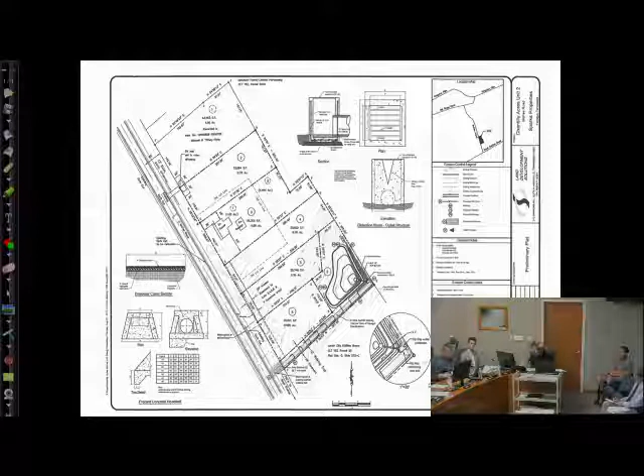Is there anyone with the applicant who'd like to speak? Have a question or comment? Mark, is this septic or is this sewer?

They are on individual septic systems, yes. Actually, I was kind of surprised by that since McFee Road was reconstructed a few years ago, but I don't think they brought sanitary sewer south of the high point. So it would be on individual systems.

Hi, I'm Rusty Baxa with Land Development Solutions, 310 Simmons Road, Suite K. We don't have any problem with any of the comments or suggestions from staff, so if you have any questions, we're happy to answer.

Questions? Is the existing house going to stay? I think so, yeah. And you also took note of the other two things relative to the final plat? Correct. Thank you. Mark, do we have any issues with compatibility with the stormwater and the open space?

Normally, stormwater facilities aren't counted towards open space, so do we feel like you need about .47 and you've got that in there? That was one of their comments, just to verify they are compliant with that. It's such a small area, it's really kind of not even a detention, it's just a low area, really.

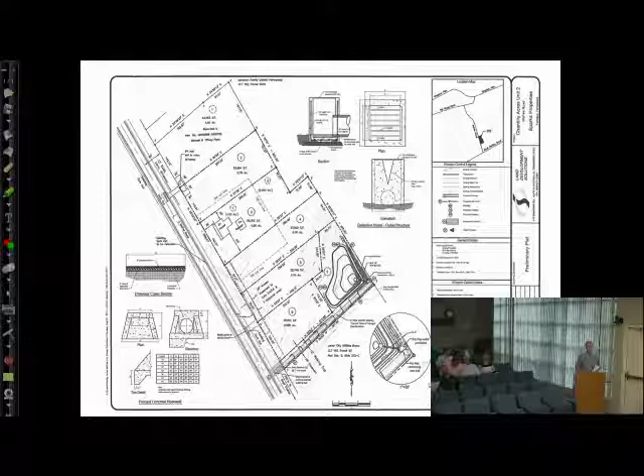What's the as-platted lots? How many total lots are there now? Well, I think there's just two - there's the one with the house and a lot that surrounds it, and then you have lot one, where the house is being built. There was a pre-existing lot, though, to the north, correct? So it's really three total lots, three going to seven.

So it's not as typical as one lot going to twenty-five. I think it needs to be treated differently. It shouldn't be held quite to the same standard as a traditional subdivision. So I'm comfortable with that. I think the walking trail placement makes sense - stormwater facilities, the open space - it's hard to, they're big lots anyway, so it's not like he's trying to jam a bunch of little bitty lots in there.

Matter of fact, all the lots exceed the R2 minimums, and that probably has to do with septic, trying to make sure they have enough room for septic. I assume they've already done their soil testing and made sure they've got good perk for their septic, and through the health department also have their reserve space. That's kind of critical for septic. I think eventually you'll probably get gravity sewer over there.

You could probably do a low pressure sewer, but it'd be expensive, and for 7 lots it probably doesn't make a whole lot of sense to run low pressure all the way up to the top of the hill. Well, there's actually only 3 new lots. Right, that's correct, yeah. You're going from really 3 to 6.

Buildable lots - the 7th is really your detention lot. So I think it makes sense, and having the joint permanent access easements make a lot of sense, trying to reduce the curb cuts on McFee Road. McFee Road is a busy road, and it's just going to get busier as the Choto Basin continues to develop. So I think it's a good use of the property, and it makes sense.

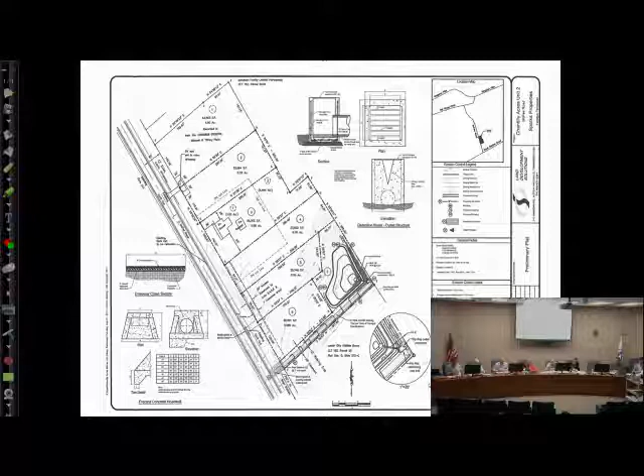Discussion and public hearing on a preliminary plat for Phase 3 of Bridgemore subdivision, 20.81 acres, 29 lots, Zone R-1 OSR, Fulghum MacIndoe and Associates Incorporated, Placemakers Number 2 Partnership applicant.

Bridgemore, as you all know, is a large subdivision being developed in phases. The initial phase was back in 2006 - a very large phase with over 128 lots. Then in 2014, the second phase, in the northeast corner on the west side of McFee Road, was developed, and that was 40 lots. Now this particular phase, Phase 3, would be just to the west of Phase 2. It's a pretty small phase, only 29 lots and 21 acres.

And so there's the lot layout shown on the screen. As you all know from our discussion back in July, when we reviewed a concept plan on the east side of McFee Road, that was on land originally part of the entire Bridgemore development. The concept plan will have to be revisited, with that land taken away from the overall concept for the Bridgemore subdivision. They'll be presenting that next month in September for your consideration, and part of that they'll be looking at making sure that the property on the west side complies with all the OSR requirements, namely the 35% open space.

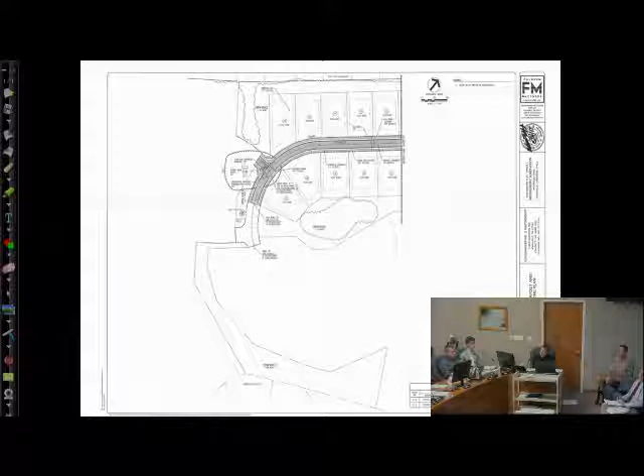So we found that the 3 foot strip is kind of a no man's land - it's hard to mow and hard to do much with it. It does give a little bit of buffer, but in the future we might want to revisit that in our subdivision regulations to consider a wider, more functional grass strip on new local streets. They've been good enough to try that out here. Apparently that took a while to convey, but we appreciate them working that into this particular plan.

The remaining comments are at your places. There's really not any that, from staff's perspective, couldn't be worked out. We would recommend approval subject to those 9 comments being satisfactorily addressed. And if you have any questions, Billy Fulgham is here to probably answer those.

Hi, I'm Billy Fulgham with Fulghum MacIndoe Associates. I'm the civil engineer for the project.

I think we're in agreement and have probably worked through most of these comments already that we've talked about. There was only one that I had a question about, and I think I've got good direction from Mark on how to proceed forward. So I really don't have anything other to add or contest.

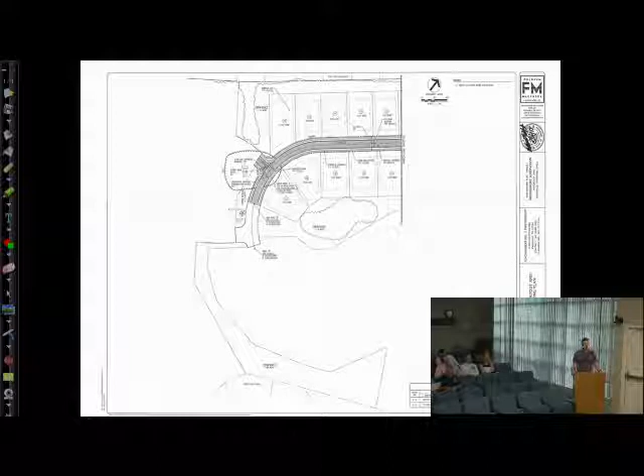Is that the one about the depressions? Yes, ma'am. Which number is it? We think that those were man-made essentially, but we just need to have a professional that's familiar with that, an expert in that area, to make that assessment based on their field review and the evidence provided by Billy.

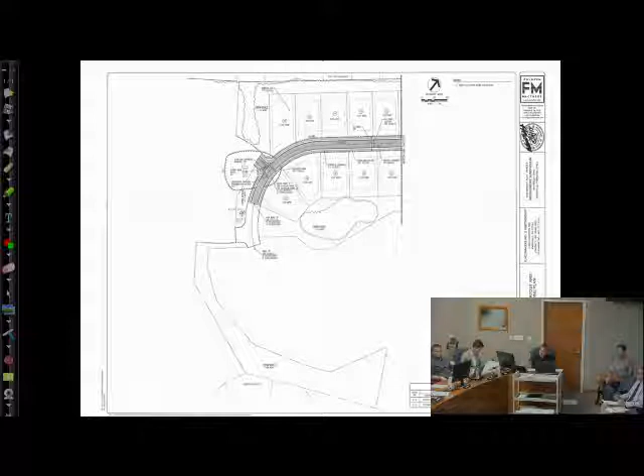Any other questions or comments? Anybody in the audience have a question?

Have a motion? Approval subject to the 9 stipulations. Second. All those in favor? Aye. Aye. I think I need to abstain.

My property adjoins this property. Do I need to? You don't need to abstain, but you can if you want to. But I wouldn't. No, I'm fine. So we'll add one more to it. Okay. Thank you.

There wasn't anything part of that that affected your property. Yeah.

Okay, number 8, discussion and public hearing on request for a site plan amendment involving modification to building elevations associated with the Farragut Gateway project, former location of Silver Spoon at 103 South Campbell Station Road, 2.2 acres, Zone C-1, First Farragut Development LLC applicant.

Property is a former Silver Spoon, as noted there. The site plan was actually approved back in May of 2016, and the property owners since that time have been trying to secure leases and get the numbers to work. As we talked about back in June, one of the issues they were running into was trying to meet the then requirement in the mixed-use town center of all new buildings being at least 2-story or having the appearance of being 2-story.

So the staff presented this issue to the commission at that meeting, and we talked about whether we might want to revisit some of that and provide a little more flexibility for smaller lots, because the issue they were having was they don't have enough physical space to provide the amount of parking they would need for the uses they were marketing toward, to have a functional second floor.

Mark, on that north elevation, it's right up near that very steep drop-off, isn't it? Yeah, so it kind of obscures the fact that it's big. It looks like a big flat, open elevation on the drawing, but in reality it wouldn't, because it's sitting down on a big drop. It would be well below the road.

Does the applicant have any questions or comments, or does anybody have questions or comments for the applicant?

Would this be addressed by the VRRB and landscaping? They've already approved the landscape plan when the site plan was approved back in 2016, and that's not really changing, other than adding some more evergreens to meet the screening requirement for the drive-through lane. That was a requirement for having a drive-through in the mixed-use town center — you have to screen it so you can't see it from any elevation. But other than that, they've already pretty much approved it.

So we're still going to see the blank red wall? Well, that's up to you all. I just point that out as really the only thing they might need to enhance a little, hopefully at no additional cost. What about doing some false windows out of brick — maybe a row lock, a soldier course, and a herringbone pattern? I think there are some things you could do.

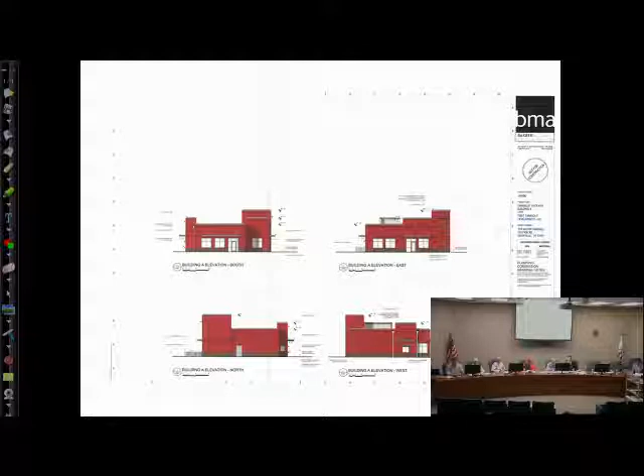Hi, I'm Ellen DeVoe with Barber McMurry Architects. To address what you were just speaking about, we have a row lock on the lower level, about 2'8" above the finished grade, then a banding up at 16 feet — you can barely see it unless you zoom in on that elevation. We also have 4 recessed herringbone patterns to reflect bricked-up windows, basically.

So you're saying on the Building A north elevation there is some herringbone? Correct. Okay, it's just not coming through on the renderings. Maybe if it's zoomed in it could be visible. That works for me — but is there any way to draw that in to make sure there's no misunderstanding?

You don't have it set up where she could put a pin on it? That way — oh, yeah, if you want to come over and draw on it, that would give us a better idea. You guys are kind of setting the tone for development in this area, and we're just trying to make sure we understand what you're doing. I'm very much in favor of what you're doing, but I think there are some details that wouldn't cost you any money that you could put on this side of the building.

Yeah, I've never done this before. It'd be a lot easier and cheaper than windows if you don't want windows. No, it's finicky — so right there is one. You can see it if you look on the computer screen. Well, I'm looking on the computer screen and I don't see it. You can see a little bit of the outline of where they are.

I can faintly see an outline on the screen. How many are there? There's 4, total on the north elevation, and you also have some on the west elevation too, plus some up high in the parapet. Is that correct? And that's for the sign — do you have signage there? Because that faces Kingston Pike.

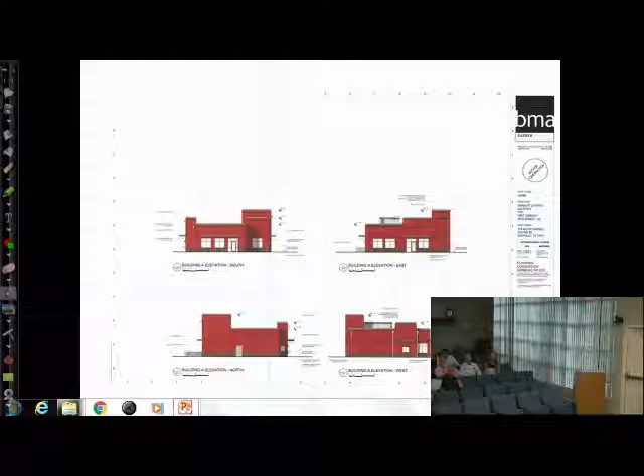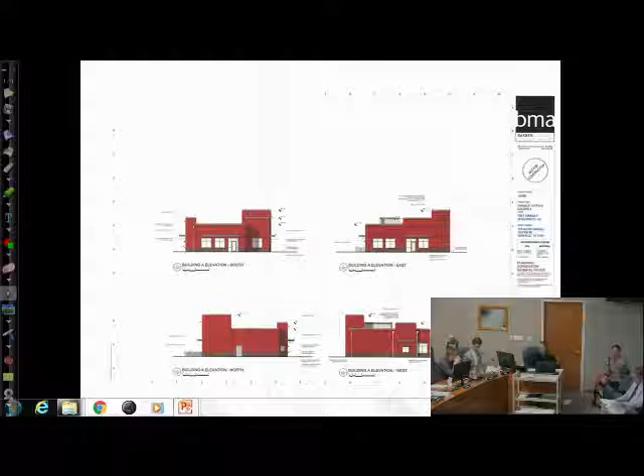But one thing I noticed coming in, and I've been thinking about this, it's the flat roof. The other buildings around here have peaked roofs, and the new Dollar General has a peaked roof. You were talking about setting the tone for what's coming. I noticed the credit union over here has kind of an interesting thing - not only a flat roof, but it has some kind of peak in the middle of it, if you've ever noticed it. We have, and John, it's a great observation.

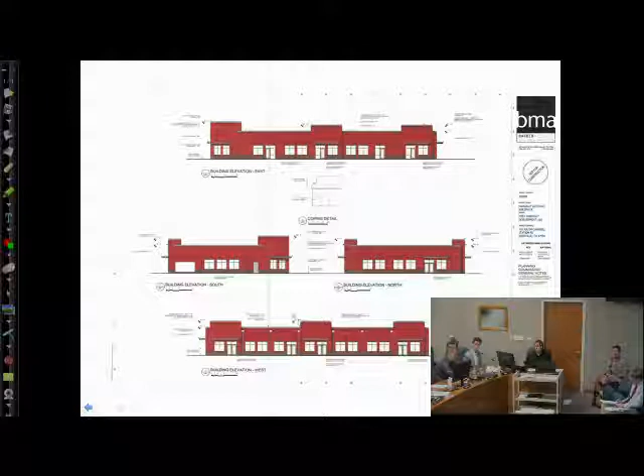What we're trying to do is in areas that are more characteristically residential, like the Dollar General store, that's when we're trying to encourage pitched roofs. In areas where we're trying to emulate what we hope someday will be a downtown Farragut, we're going with more historical downtown style buildings that have flat roofs. So yes, I agree with you. The jewelry store across the street has a pitched roof, but that's not exactly what we're going for. We're really trying to set this tone for more of a downtown style flavor.

I know it's hard to look out a number of years and think that Farragut will have a downtown, but this is really the start of it. We're trying to create a bit of that type of more urban architecture. I hope that answers your question, John. Yeah, it does, and I'm absolutely in favor of getting that thing developed as soon as possible. I just wanted to bring it up.

So it will be a change, but someday some of those buildings will be renovated. The property becomes so valuable that somebody will want to tear them all down and start over again, and then we can hopefully bring them into compliance at that time. Excellent, thanks. It's always good to have a dream. Do you have any other questions or comments?

Were there any subject-tos? No, that was the only thing, just to look at the building elevations. Like I say, for the site plan, we'll look at that in-house and make sure the subject-tos have been addressed. And it's pretty much the same site plan you've had since last year, isn't it? Oh yeah, yeah.

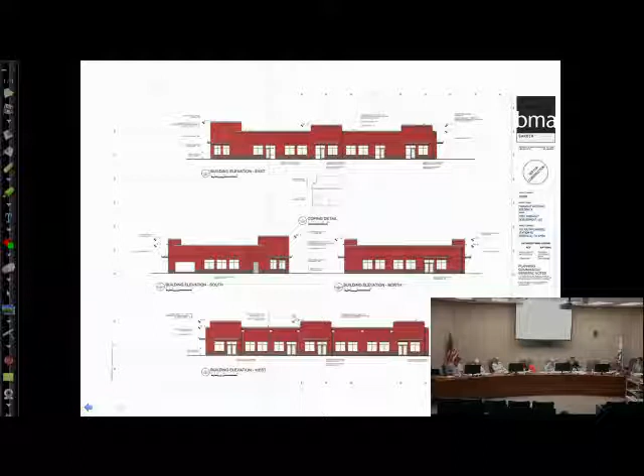Motion? Move to approve. Second. All those in favor? Aye. Opposed? Thank you for coming in. So when do we start digging a hole?

A public hearing on a site plan revision for the Overlook at Campbell Station Apartments, parcel 108 and 109, tax map 130, zone R-6 OSMFR, 820 North Campbell Station Road, 31.94 acres, GBS Engineering applicant.

Should have brought a sleeping bag roll for this one. This particular project has got a long history, as you all know. Back in 2014, it seems like forever, we revisited our multifamily zoning district, the R6, and as part of that we created an open space version of what we've done with single family, like the OSR and OSMR - that's the R6 OSMFR zoning district. That district would allow you to build taller buildings and lessen the setbacks.

It gives you some flexibility that you wouldn't have in the regular R6. But in exchange for that, the development had to leave at least 50% of the land in permanent protected open space. So this property north of the Holiday Inn Express was rezoned in 2014 to that zoning district. That's the only property in the town currently that is zoned this. And since that time, they've presented a number of site plans to you all.

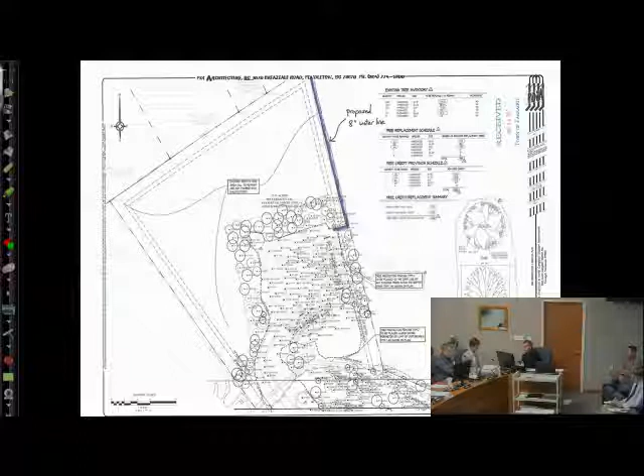The rest of the buffer would be left in its natural condition, and that would come in almost like an angle to serve that northernmost building.

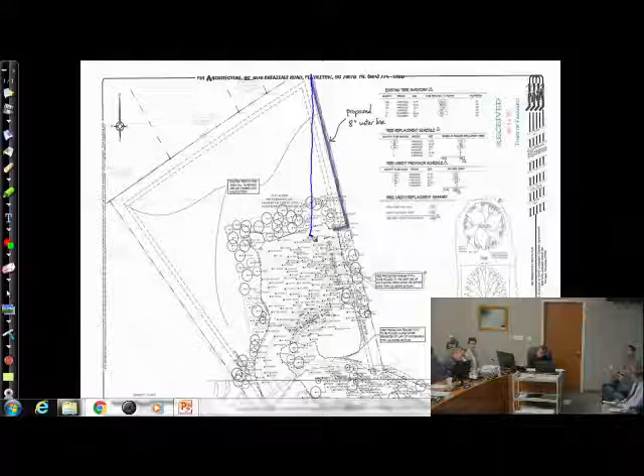So that would be something for you all to support regarding the line extension. Now it is obviously in the open space, and we've continued with each site plan to encroach into that open space, but they still meet the 50%. Yeah, that's one thing to consider.

Another item — I don't know if you want to talk about these individually before we go to the sanitary sewer, or I'm just trying to cover the new information from that. But that's the first one. Let's see if I can get this to work right.

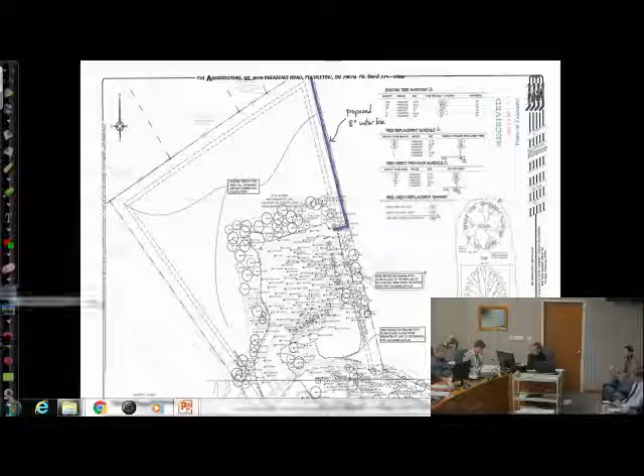What they would need to do there is demonstrate that within the portion of the buffer strip they bisect, they're not removing any mature existing vegetation, because that's a requirement in the zoning district. It looks like they could do that, moving it around a little bit, since we're just talking about the buffer strip part.

The next thing to talk about — and I think we discussed it in 2016, but I've slept a few nights since then — is whether this development, as you're driving along Campbell Station Road and look over at it, has that project-identifiable, iconic architectural feature that you identify with this particular development. They may have something else to look at for you all to consider.

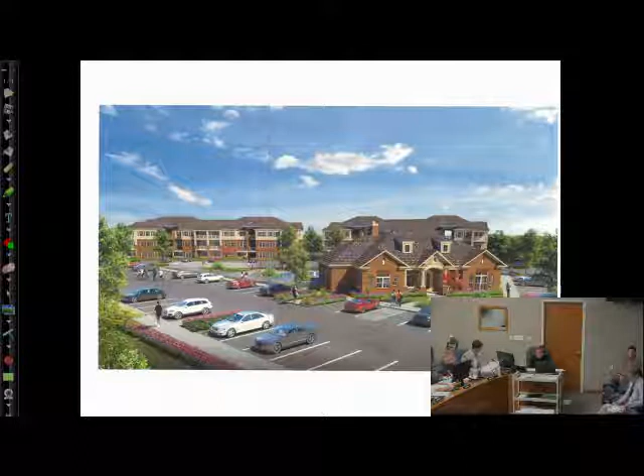Does anybody have any questions of Mark? Or this Mark?

I have a question. Comment number one is, please provide a remote emergency access road.

Are you even capable of doing that on this? We're showing it as a reinforced soil area right there, just as you go past the storm pond, the first pond on the right. What he wants is a detail of how it's going to be able to handle the 30,000 pound load. I've already got that. I just didn't include it on the details yet, but it's going to be a reinforced earth woven basket put below the grass, so you won't see it, but it will be able to handle a 30,000 pound fire truck, because I've got another project right now where I'm doing a driveway to handle that.

And they're doing it in gravel. So my name is Mark Bollick.

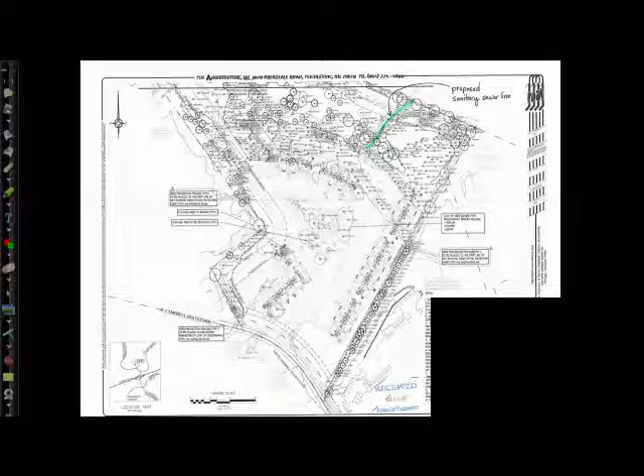I'm with GBS Engineering, sorry, Ruth. And I'm at 1313 Calmia Road. And I'm not the only one that's going to be presenting stuff in front of you today. As you can see, we have a little crowd tonight, so I'll turn it over to them. We're here to answer any and all questions you have.

Good evening, I'm John Gumpert, 3924 Paces Ferry Road, Atlanta, Georgia. I'm here on behalf of the development.

I'd like to thank you guys for sticking it out over 3 years. I know it's been a tough process. I do think there is a need for high-quality multifamily in the town of Farragut. And we welcome you, and we're glad you're here, and we're glad you've been able to find some common ground with some of these issues that you've worked with over the past couple of years. And we kind of look forward to trying to resolve some of these issues tonight.

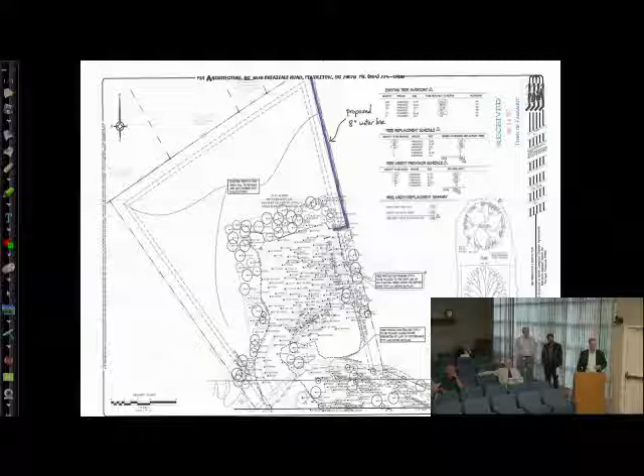My thought is on the water line, if we'll just kind of tackle these one at a time. We've got three issues if you want to boil all the fat off: a water line, a sanitary sewer line, and may or may not have a brick issue. But my thought is on the water line, if you could get creative, being that a water line doesn't necessarily have the design criteria that a sanitary sewer line does, maybe you could do a little jogging over there to move around some of the big specimen type trees. Then you could locate that water line with your surveyor and determine the easement. It might be a pretty easy way to do it. I'd much rather you see you cross it diagonally and get creative with your design than go parallel with the buffer. I think it really sets a bad precedent.

Even though there aren't houses next door to you with folks that have backyards that back up to you, the reality is they're residential zoning, and we want to treat everybody fairly and evenly and put everybody on a level playing field. So my thought is if you could get creative with that, I know it's not as easy as drawing a straight line from point A to point B, but I think it might solve your problem. I'm not saying do a lot of jogging, because I know an 8-inch water line especially is an expensive water line. But I think you could put it through there, get it across that buffer, and then get it over to where it needs to service your buildings.

Yeah, we're happy to do that. I think that's a common sense way to fix that problem, and that's not a problem.

Anybody else have any more questions? No, I just reinforce the comment and say that it's a must to have that water line in there. It's a safety issue. Yeah, we're enhancing the fire protection, and the other side of it is for this development we have 50% undisturbed, and it's still 50% undisturbed. Having said that, jogging the line to avoid specimen trees will make it better for everybody. So I'm happy to do that.

The challenge with the sanitary sewer, which has been done before, is dealing with the aquatic buffer. Obviously we try to keep everybody out of the aquatic buffer, but sometimes sanitary sewer has to go where sanitary sewer is. You just don't have a lot of options, especially when you're trying to tie into an existing line.

Is there an existing line over on the other side of that little drainage way? Is that what you're trying to tie into, a manhole over there? We are being directed by First Utility to hit a specific manhole.

On the utility plan, we had to go out and have it shot, the rim and invert shot. We have barely enough invert to get running minimum slope to get underneath it. Like 1/8 inch, I take it? It's got to be an 8-inch sewer because it's main.

No, I would say 1/8 of an inch of fall. Well, we're looking at 0.5%, which is the minimum you can do for an 8-inch line.

When you're in an aquatic buffer area, we don't quite give you the flexibility we would give you in the open space in the back, as far as just putting it wherever you want as long as you go around the trees and save what you can. Here, it's a little more critical.

So I guess based upon your tree survey, you've tried to snake it in there. We also have to watch out for the proposed storm pond to the south of that too. How deep do you think that line's going to be there?

Where it comes across the aquatic buffer, at the minimum depth I can make it, it's going to have about a foot of cover underneath the intermittent stream. What's nice about that is it's going to keep your slope laybacks to a minimum, and keep that disturbed area to a minimum.

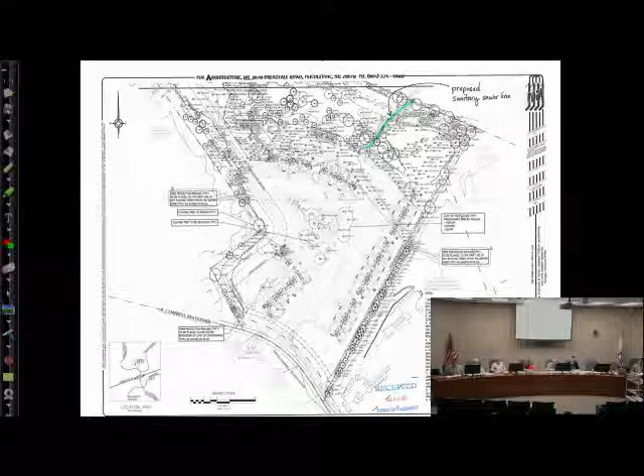And obviously you have a topography issue trying to get to that manhole. The problem is, in our original plan, we tried to tie it in underneath our proposed culvert. To do that, we were running with sewer depths of 28, 30 feet, and First Utility said no, nobody wants to service a line at 30 feet. So they came back and said, go this way.

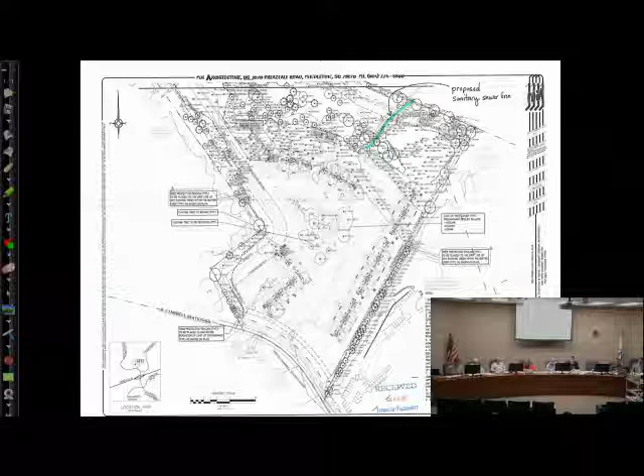And in fact, they're also making us, on the units running parallel with the apartment complex, gravitate all the basement units over to a lift station and pump them up into the sewer system that'll be in the parking lot, which is where they're asking us to put it. It's not where I wanted to put it, but that's where they want it. Those will be, the lift station and the force main will be theirs once we get done.

The gravity sewer for that, all the rest of the 3 stories above will go towards the parking lot. We're having to do a split sewer system for those 4-3 split buildings there, which is going to add cost to us. That's what First Utility is requiring us to do, so we have to do it.

Well, when you have East Tennessee topography and you've got to run downhill, sometimes you got to pressurize, and there's nothing you can do about it.

Does anybody else have any questions or comments with the sewer line? We'll have to mark that one too. Like I say, on the buffer at the very top, they'll have to make sure they don't disturb any existing mature trees. The 35-foot buffer strip, based on this, it looks like they could get it in there without doing that.

So especially if it's that shallow. How big a line is that going to be? An 8-inch line. Root pruning on both sides, it's probably going to be an 8-inch line, and we have to hit a manhole in a space, so it's not like we have a lot of opportunities to wig and waggle.

Any more questions and comments? And then the iconic question is the next one. Pat, I'll let you talk to that.

My name is Pat Iannelli, I'm the architect with PDI Architecture, 1020 Breazeale Road, Pendleton, South Carolina.

So originally, back in January of 2016, what you're seeing is what we were proposing as iconic elements for the development or for the building. I think there was some clarification that it was more of a development iconic type feature, which was wanted to be seen from Campbell Station Road. So we've been going back and forth, and we've come up with some schemes which Mark has not had a chance to see.

The first building, the closest to Campbell Station Road, and I don't know if you can, Mark, can you change it back to, we have a site plan. Yeah, let me see what.

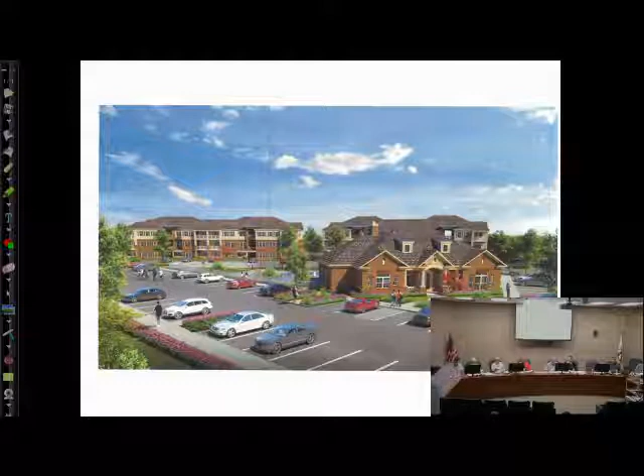Trying to think of which slide would be best here. Well, I'll just show an overall site plan. I think this might show it. No, it's the wrong one.

And on the southeast side of that, which would be viewed, we are proposing to do some tower elements similar to what we were doing on the buildings, only more substantial.

What you see at the bottom is the facade that you would be seeing, and this board shows enlargements of those iconic towers. That element will set the stage for the project and be what's viewed and identified with the project, which I think is what the desire was with the development standard.

I like the towers. And are those windows going to be active in those top floor units? Yes. So that corner, yeah, I think that would be a real desirable unit to have, super.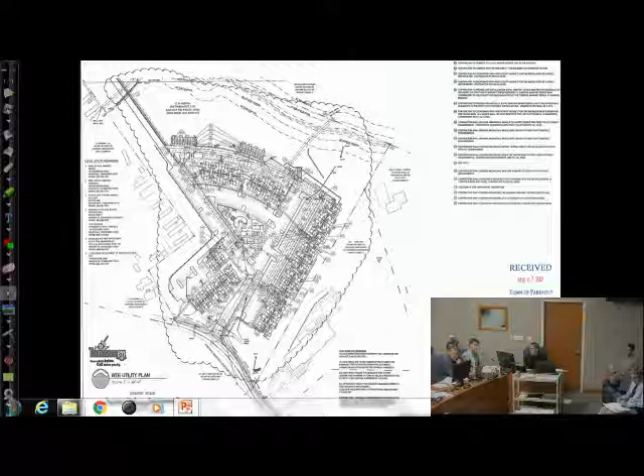I don't disagree, but I'd make the observation that from these renderings and looking at the iconic element, I don't see any reason for concern. I'm not hung up on whether it's 68% or 70% or whatever - I'm looking at what's covered and what's the transition zone in this set. I know what I've seen with the iconic elements. I think bringing all the elements together is good for the record, and what we'd have is some variance we can talk about. We don't have to talk about percentages of the variance - we can talk about accepting the variance from the previous submittal and move forward on that. So from a cleanup standpoint, fine, but personally, I'm satisfied with the coverage I see.

Well, I think the more brick, the better. I think it's a classic look. I think it shows a permanency. We talked about that with developments before. But

I want to see what I'm voting on. Yeah, I think bringing it together in one package is still good. But I think we've got to have exhibits entered into the record that don't have a piece from here and a piece from here. It needs to be cohesive and it needs to tie back into the site plan.

Probably not what you guys want here, but this body has to be able to arm the staff with the right information when you guys submit your construction documents. Otherwise, you're going to get held up there, and you're going to come back to this body. Because if there's a gray area with staff, they're going to say, well, you got to go back to planning commission because that's not exactly what I remember.

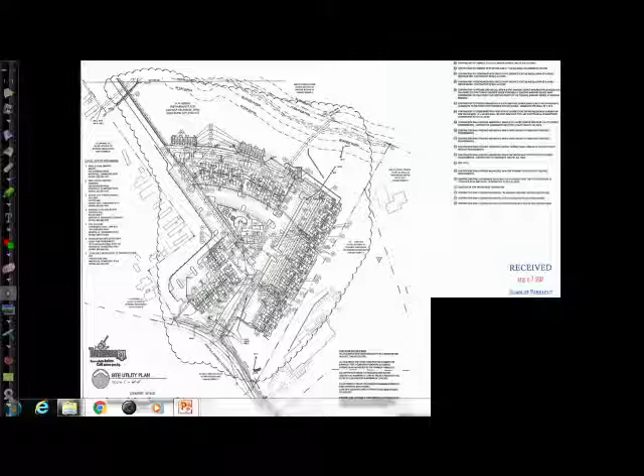Because it really can't - until you've got a set of elevations, you can't even pull the trigger. You're in schematic design right now. It's hard for you to go all the way to construction documents. So we're quite a ways down on construction documents, but the issue for us is we're not able to go to final closing with our loan until we have your approval. And then an ultimate building permit.

Now, could we start clearing? Could we start some grading if we were able to pull a site permit? We might fund that out of equity. Okay, so we might be able to start that - we own the land. But it is certainly important to us to get full approvals on everything we're doing.

Well, you don't want any moving targets any more than we do. No, we sure don't. But I do appreciate where you're coming from on that question of percentage of brick.

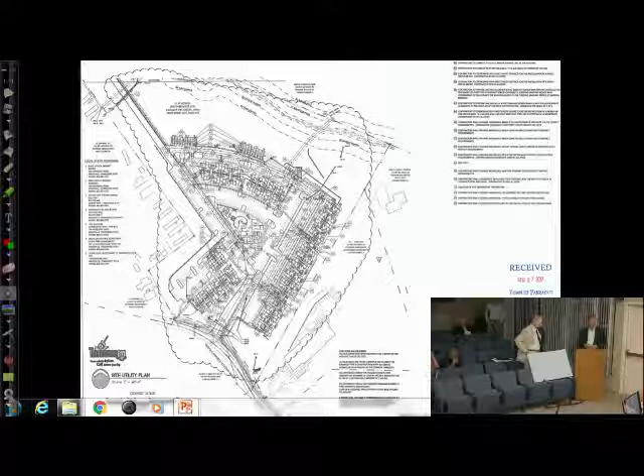Okay. Okay, Mark, how do we craft a motion? Well, my old motion will just die for lack of a second. So if somebody else wants to go at it, I think Louise looks energetic enough to jump on this motion. I don't know that you can craft a motion and accept all the subject-to's except 10.

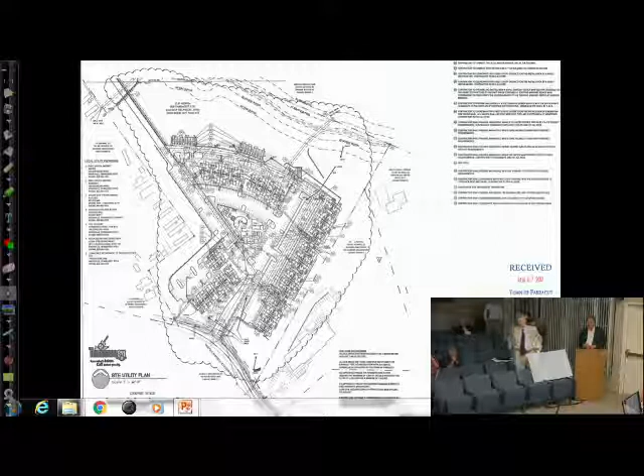Well, you got to be careful, because if you throw that one out, then you're on the record saying that one doesn't apply. That's what I mean. How do you - defer number 10 to the next meeting. There you go. Clear that - number 10 will be considered at the end of September.

Approve, per the subject-to's, deferring number 10 to the next meeting. Well, you did a lot better job than I do with my motion - you did yours in about 7 words, and mine took about 55 words. So I will second that motion. Okay, Mark, are you - yeah, I got that.

Okay, we have a first and a second. All those in favor say aye. Aye. Those opposed? Thank you.

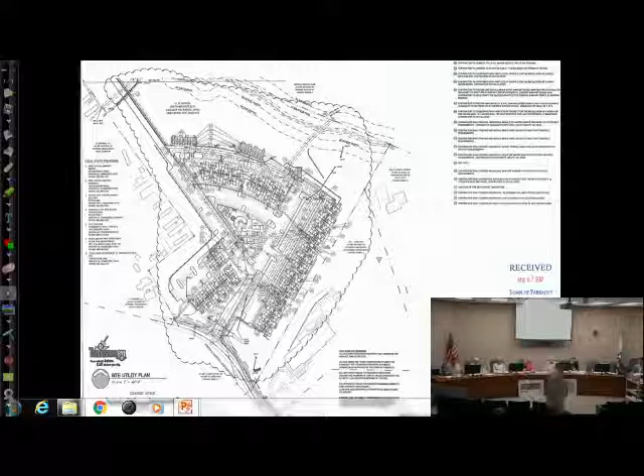We move on to discussion and public hearing on a request for the recommendation to the Board of Mayor and Aldermen concerning traffic calming applications on Thornton Drive in Thornton Heights subdivision.

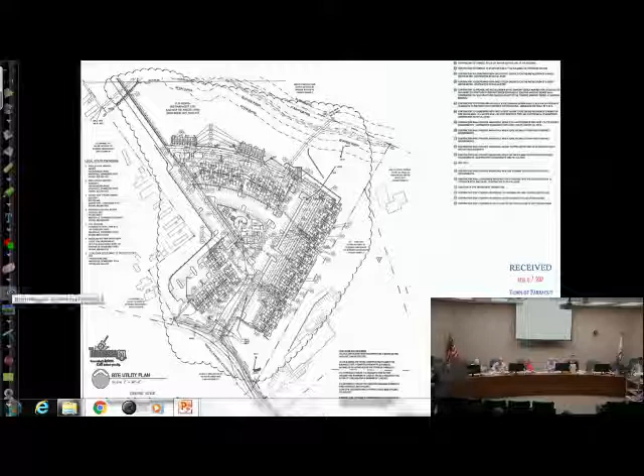I'm going to turn this over to David Sparks, Assistant Town Engineer, and I can toggle through these slides for him, but he'll give you an overview of this project and what the town's proposing for the traffic calming measures. We've talked a lot about this issue directly and indirectly, so it's exciting that we've got a subdivision where we're asking to apply these techniques. So you can just let me know when you need to go to different slides.

Thank you, Mark. Good evening. I'm David Sparks, Assistant Town Engineer for the town of Farragut. What we're here for tonight is that several citizens back in September of '16 submitted a traffic calming application. They were concerned about speeding in the Thornton Heights subdivision.

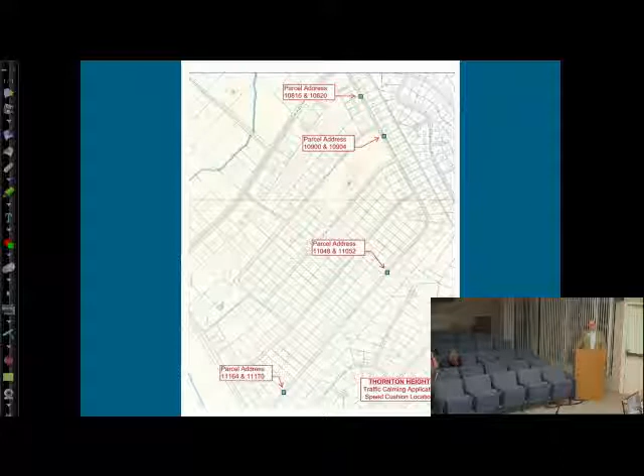So they've gone through the process, and where we are right now is we've done a study, put together costs, and had public meetings. What you see on the slide is just about all of Thornton Heights, and there are 4 locations where we, as the traffic control team, have selected for traffic calming.

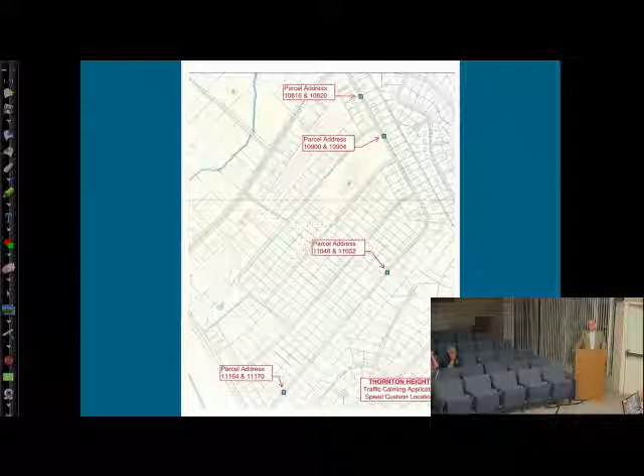In this picture here, it's an aerial view showing the location of each of those traffic calming devices. We tried to strategically place them so they wouldn't inconvenience folks pulling into driveways, backing out, or pulling campers and trying to back in. That's the reasoning for their locations, and we also wanted to get a few devices on the Kingston Pike side and a couple on the Concord side.

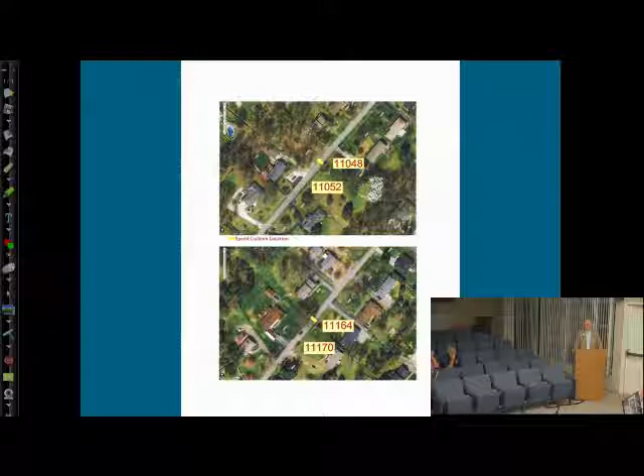The speed study we did was somewhat consistent throughout Thornton Drive, ranging from 33 to 36 miles per hour.

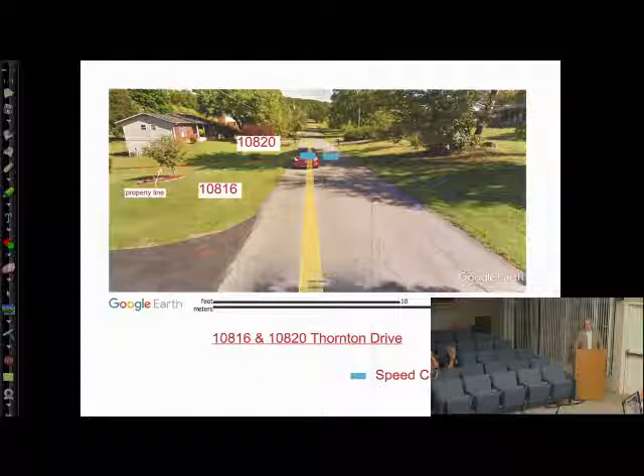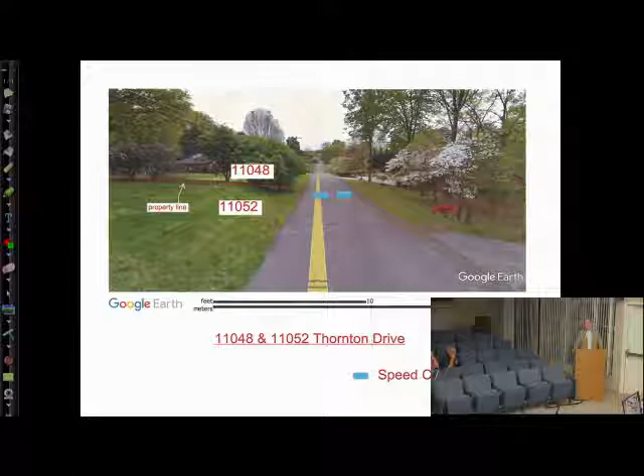This is, if you will, a windshield view of where those locations are. I've drawn in those little blue spots to show you where they would be, and there's a red line that's the property line. You can see there are no driveways at that location. Same with this next one, no conflicts with driveways. And again, this final one, no conflict with driveways.

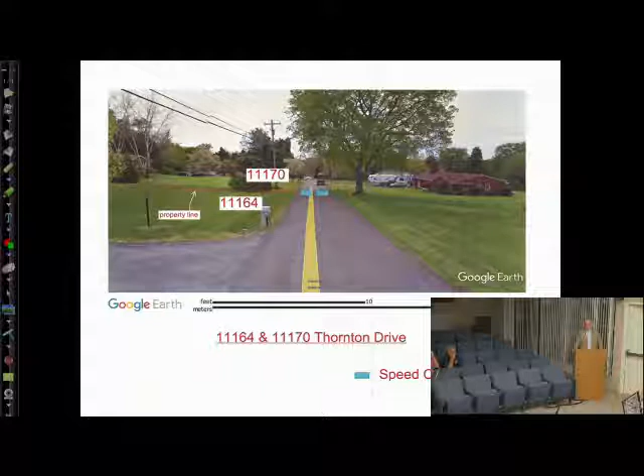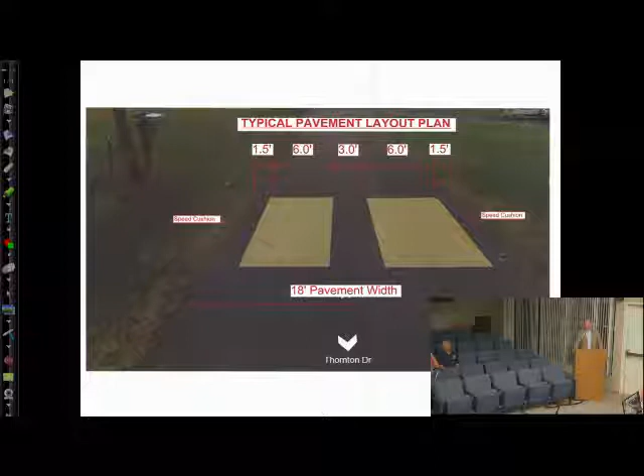So what we're here for tonight: this is a layout, a typical layout of 2 traffic calming devices, spaced such that emergency vehicles can still traverse over them without interruption of their response. It's basically a table - a ramp up, a flat spot, and a ramp back down. It's not a bump.

These are actually made out of a high-density rubber, not asphalt, so they're movable if you ever wanted to relocate them - they're bolted down. Is it the same sort of object that's on Clover Fork? That's correct, and I believe it's the same maker - the lowest price we got is from that same maker, so it'll look similar.

If anybody has been through Clover Fork, off of East Fox Den, you definitely have to slow down. Yes, you do. One thing I noticed when I used to go through there a lot - if I were living in a house, I might worry that I'd hear cars slowing down, hitting that bump, and then speeding up again. Is that an issue?

I have information on that because I asked the woman that lives right on Clover Fork, right in front of it, and she says it's not an issue at all. She's got young children and she's thrilled to have them right in front of her house.

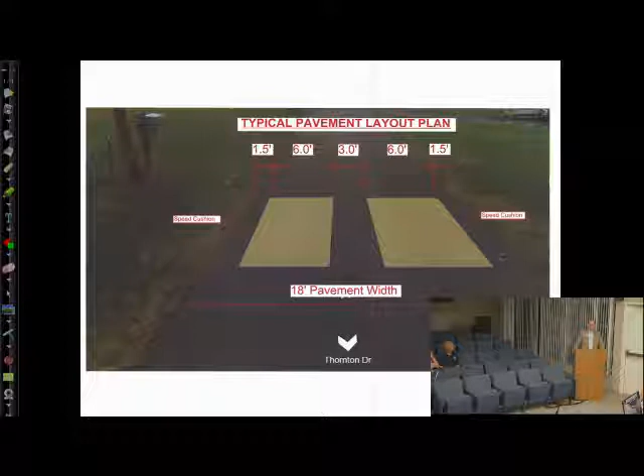Have they been involved in where the placement is? Are they happy with the placement of the speed cushions? The traffic team, made up of 4 residents and 2 staff members, Daryl and myself, selected the areas, and several of the residents are here. But as for whether every resident next to these locations knows exactly where they are, I don't know that all of them do. We haven't contacted each resident that's next to it, unless any of you folks have, but I have not.

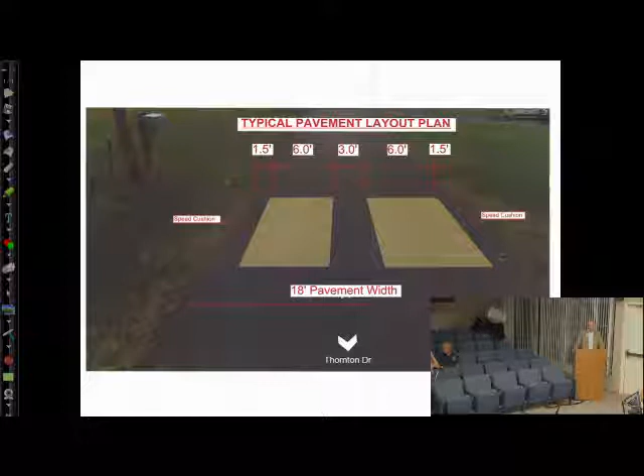The width is about approximately 6 feet. What's the length? I think it's 7 feet. So 6 feet wide by about 7 feet long. And how thick are they? About 3 inches, 2 to 3 inches, something like that.

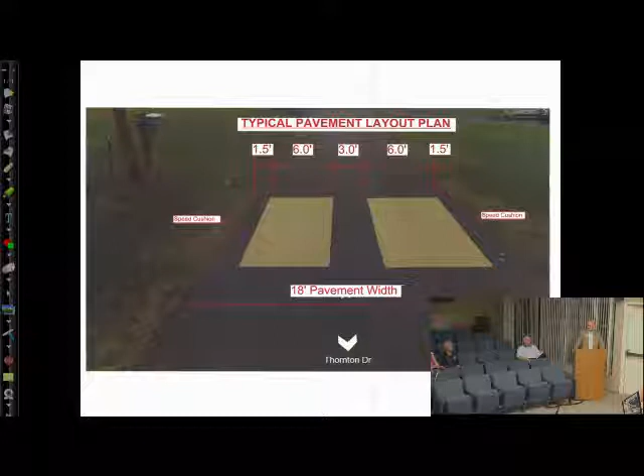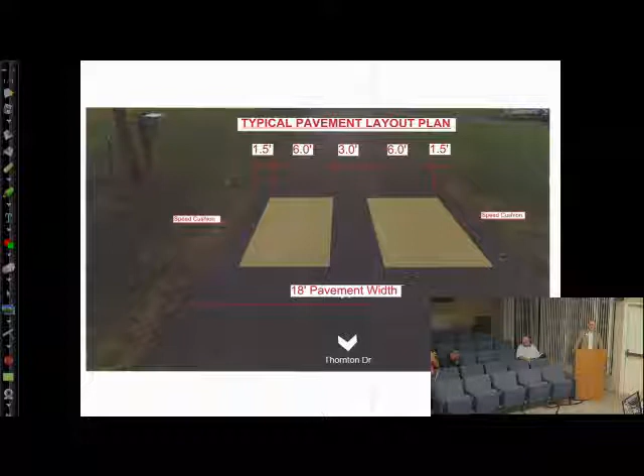Now, the question is, do they make the teenagers slow down? Yes, unless they want to launch their car up in the air. What I also like about it is I think they look pretty affordable compared to having to do something out of asphalt with mobilization and all that. I think it's a great way of doing it. Yeah, it's just so superior to any kind of asphalt traffic calming device.

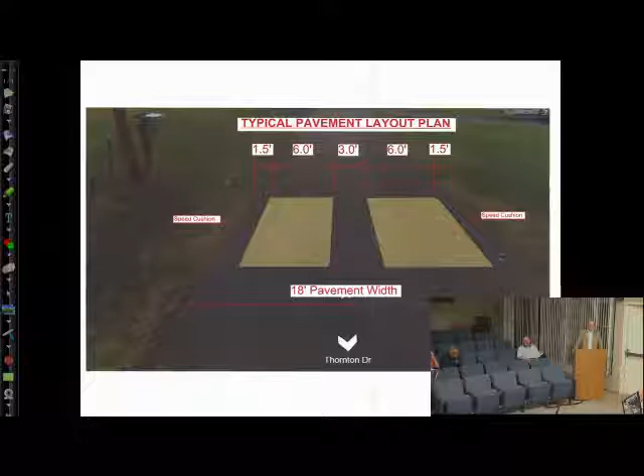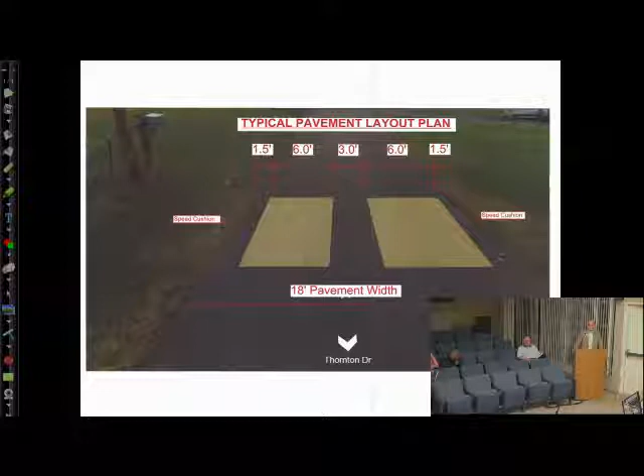To get back to your question, when we sent out the ballots for the vote, we did include a map of roughly what we thought would be the locations with addresses. Everybody in the affected area got a ballot to vote and a map. David, I'm sorry, go ahead, you had your question first.

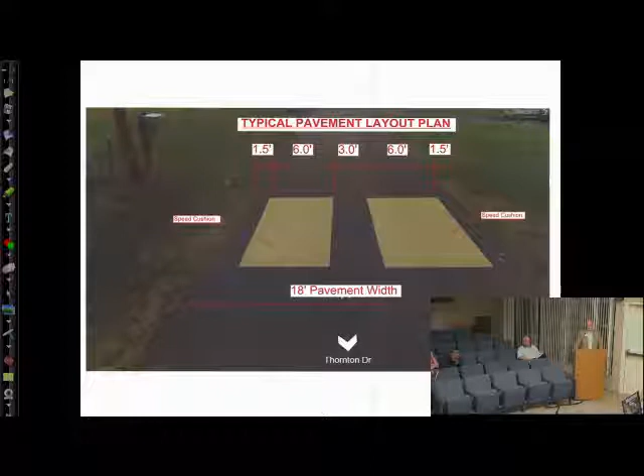One of the things your committee discussed was that the speeding is also related to people using it as a cut-through to go all the way around and avoid the red light. They suspect it'll move the traffic to the next road in Thornton Heights. And in Uland, they still have to go across the one near the church, so they'll still have two they have to go over. That's one of the reasons some were placed in that area, where the speeding was highest, hoping it'll also take some of the traffic out of the subdivision rather than have it go through there.

What's the 85th percentile level? What is it that determines a speed bump is warranted? Is that 35 miles per hour? Yes. That's the policy.

Because that's not written in our policy itself, that particular number isn't in there. And the policy doesn't have the road classifications. We only currently allow it on local streets, correct? Correct.

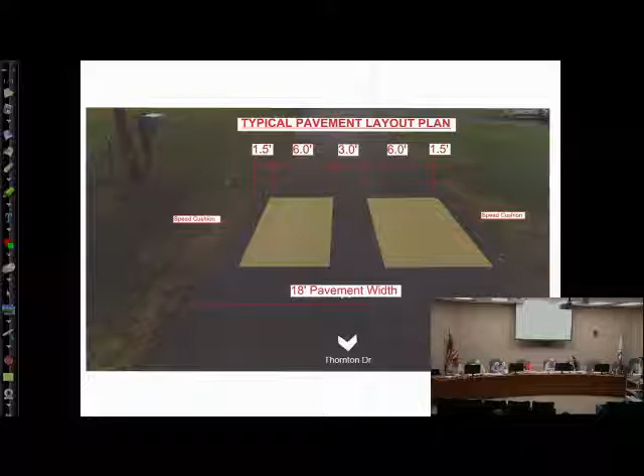I am interested in maybe exploring expanding that to local collectors. We have a few streets that are considered local collectors but are turning into major collectors for the same reason. Sonia Drive is the one I'm thinking of, although given the incline of that street, I'm not sure you'd find a place to put speed bumps, but they have an issue because it's used as a cut-through.

Yours is probably a local street. Sonia is considered a local collector. We also have the issue on Union Road, the part we're not repairing, I'm assuming, is a local collector, and they have the same issue—people using it as cut-through traffic, and they can't even pull out of their driveways safely. It's dangerous, so I would love it if we explored that opportunity.

Anybody else have any questions or comments, or anybody in the audience?

Well, I know that. I need you to come up.

I'm Lewis Howard, 10820 Thornton Drive. Can you say that again into the microphone, please? I am Lewis Howard, 10820 Thornton Drive.

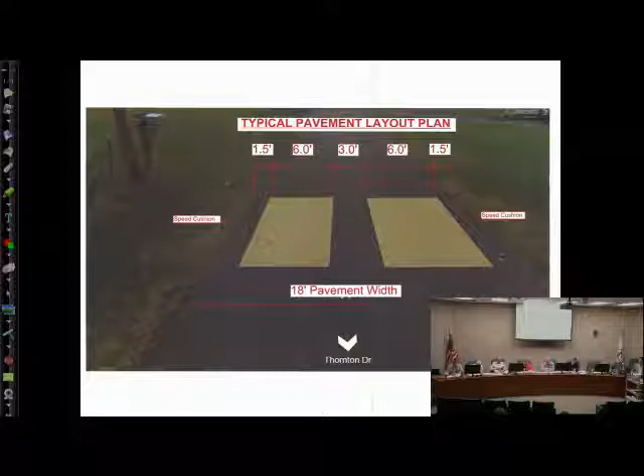I just want to tell you guys, these two gentlemen right here have been a blessing for us, because I've been complaining about this for years. And when they started on it, they saw what we were talking about, and luckily they agreed. So hopefully now we're going to get something done, and we appreciate it.

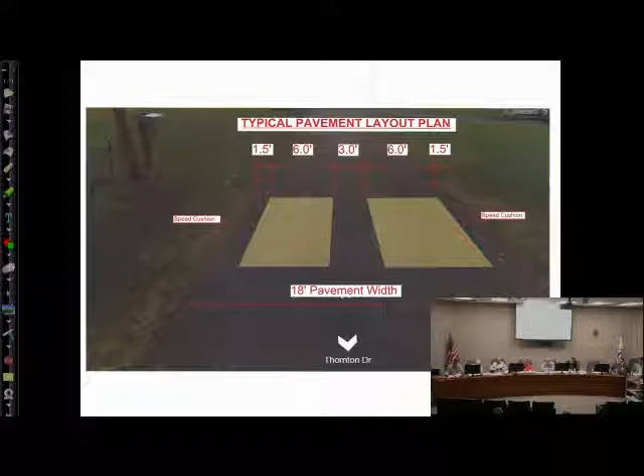Can I ask you a question? Yes, ma'am. Have you driven over it? Yes, ma'am. And on Clover Fork, you know what you're getting into? Absolutely. Okay, I think they made a great decision on that too. Okay, thank you. I just want people to know what they're getting into.

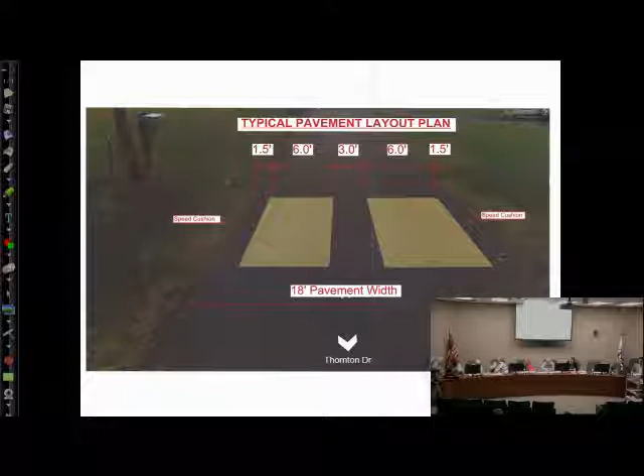It's been a long time, Mr. Howard. We always say that 65% is our threshold on the votes. Is that right? We got 82 here. Correct. That's great. Anybody else, any questions or comments?

I move for approval. All those in favor? Aye. Opposed? Thank you. Thanks for all your work.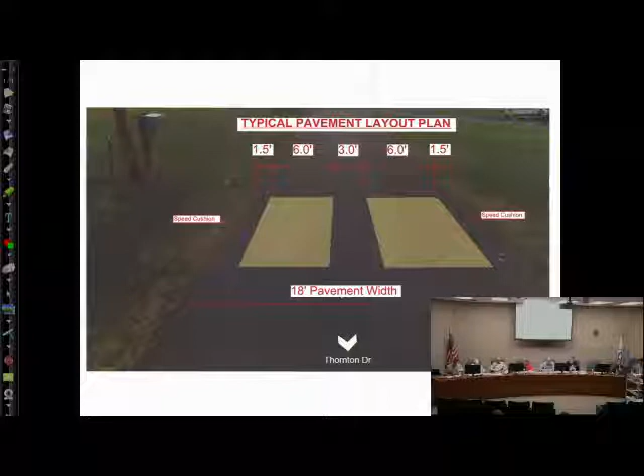Thank you all. Discussion and item number 11, discussion and update on the master plan for McFee Park.

Hi, I'm Sue Stuhl, the Parks and Leisure Services Director for the town of Farragut. We're here to talk about the new updated McFee Park master plan. Included in last year's capital investment plan was the update for the master plan, and subsequently moving forward with the next phase of the park.

We have had 2 phases completed. The plan was last updated about 5 years ago, and the Board of Mayor and Aldermen approved a contract with Ross Fowler for the project last September. So this is the plan that is being proposed.

A racquet court area with 6 tennis courts, 4 pickleball courts, hitting wall, and restroom. Destination playground geared for older children and young teens. Dog park with both large and small dog areas. Amphitheater with a restroom, storage, and a small meeting or prep room. Disc golf course with 18 holes.

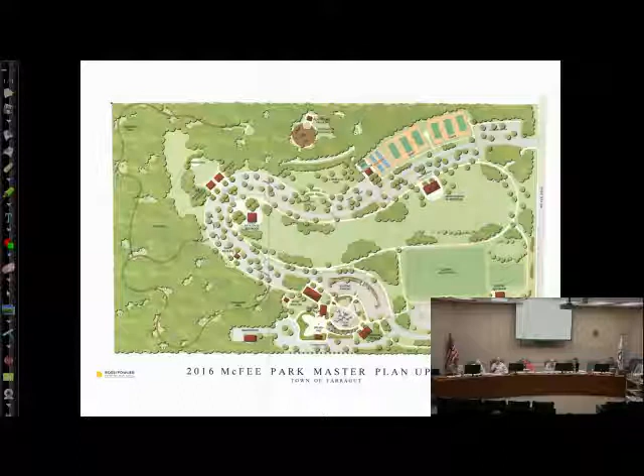This is awesome. What an asset to the town of Farragut. Really, this could be a host site for all the festivals that need it, the Red, White, and Blues, and the food festival. You got tons of parking, and you've got tons of green areas, and you got restrooms. You got all the things that really bring the ingredients together. I wish I could just snap my fingers and it would be done. Unfortunately, there's many millions of dollars that we've got to spend. But what a great asset, really, and for all of Knox County.

I think so too. It's a beautiful plan. I have a question about the destination playground. Is this area surrounded by a wooded area? It is.

It's old hardwoods that are up there, but it's sort of up on a knoll. My concern is, and we've had this in my neighborhood, in an area that's part of our homeowner's property—that's a wooded area—we have people, I don't know if it's kids, but people who are in that area at night doing things that's against the law. This area looks to me to be very isolated.

It's not as isolated as you think. It's actually a lot closer. That's been a topic of discussion with many different people, and it's closer than you would think. They're old hardwoods, so you're talking about not a lot of brush and infill. And again, we're just looking at the overall plan and not the details of each little facility yet.

One of my recommendations, and we've talked at length about this, for this new phase, it would come with cameras. It's the way of what we need to do in the future.

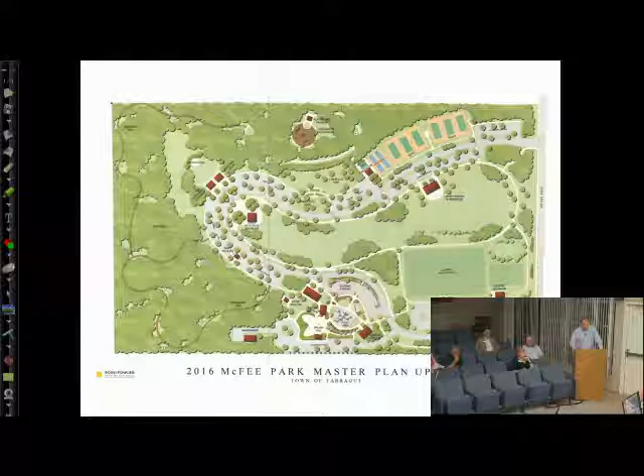You know, $12 to $13 million for a park, again, I'm all for it later on down the road. Let's take care of the needs that need to be attended to before we move forward with the park. I love the parks, I mean Campbell Station or Founders Park, whatever you call it, I walk it every single day, and I'm very grateful for it. I'm not trying to deny other people, I'm just saying we need to be responsible stewards of the money. Before you start spending money, you need to attend to things that need to be taken care of, and not waste money, because some hard times could be coming. Who knows? Thank you very much.

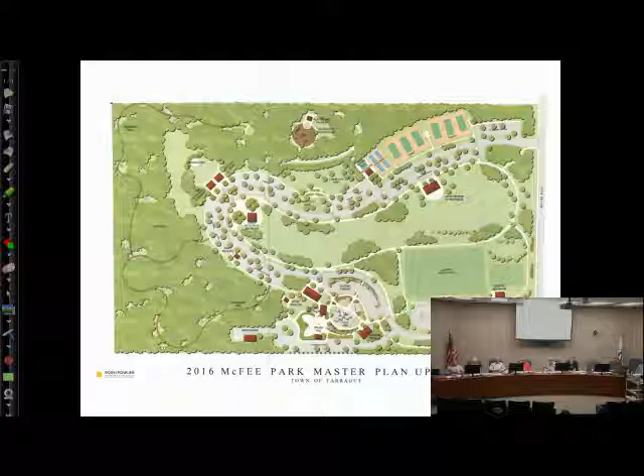One of the things that Sue hasn't mentioned is the grants. Sue and the engineering department both do an excellent job of getting grants for the town of Farragut, for roads, and for the Parks and Recreation Department. We will definitely keep going on that. The biggest grant available for us right now is a state grant from real estate tax transfer fees, and that's every other year, so we would definitely keep moving ahead on that.

Anybody else with any questions or comments? I'd just offer an observation from Mr. Clancy: what we're looking at is just us approving the concept plan from a site, from a development type frame. The board, mayor, and alderman will address the phasing and the amount of money, the actual money. So, your words, I encourage you to go to their meeting and express your views there. I will, thank you.

So we need to make a recommendation on this, yes. Do I have a motion for that? We have to make a recommendation on the master plan, updated master plan for McFee Park. I move to recommend approval of the McFee Park master plan update. Do I have a second? Second. All those in favor?

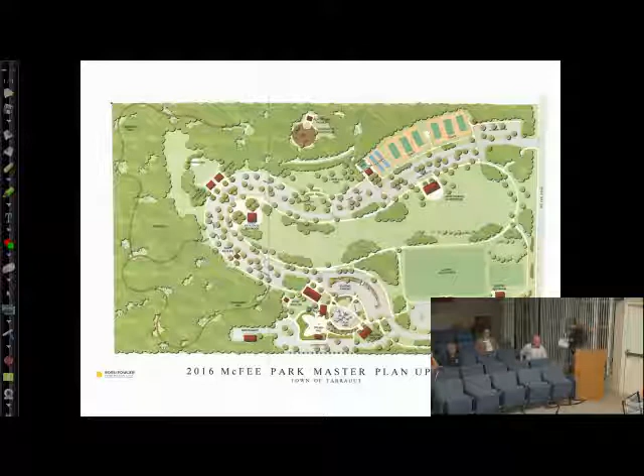Aye. Oppose? Thank you. Do we need to, is it time for a tape change? Three hours is when we have to. Okay, unless y'all need a break just for other reasons, which is perfectly fine. We can do that if you want to. We ready to move on? All right, ready to move on.

Number 12, discussion on an update to the sinkhole ordinance. I'm going to turn this one over to Bart Hose, the Assistant Community Development Director. He's done all the work on this. I give him all these really easy things to do, but he's done a great job trying to formulate this update, and he can go over how we got here and what we're proposing to have revisited in this ordinance.

You could have waited till the telecommunications ordinance for him. Yeah, I know, he came a little late, didn't he? That's probably why she left. Well, this is a first. This is his first time to appear before us and talk.

Again, I'm Bart Hose, the Assistant Community Development Director for the town of Farragut, and I am here to talk about possible amendments to the town's sinkhole ordinance. This item was referred to y'all by the board, actually by a recent decision and recommendation made by the Board of Zoning Appeals. Recently, the board heard a variance request from the Dollar General store to fill a portion of an identified sinkhole area to support the extension and construction of a required interparcel connection drive and a walking trail as part of the project.